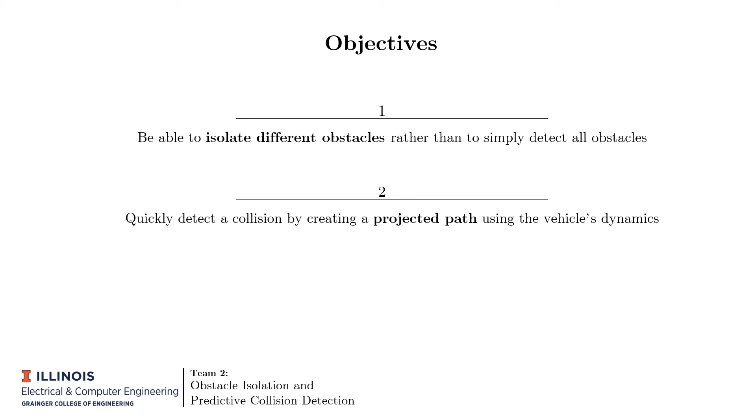In this video, we'll talk about obstacle isolation and predictive collision detection. We have three main objectives. First, the ability to isolate different obstacles rather than simply detecting obstacles. Second, quickly detecting a collision by creating a projected path using the vehicle's dynamics. And last but not least, we want to build a more robust system for failures of the perception devices that are used to detect obstacles.

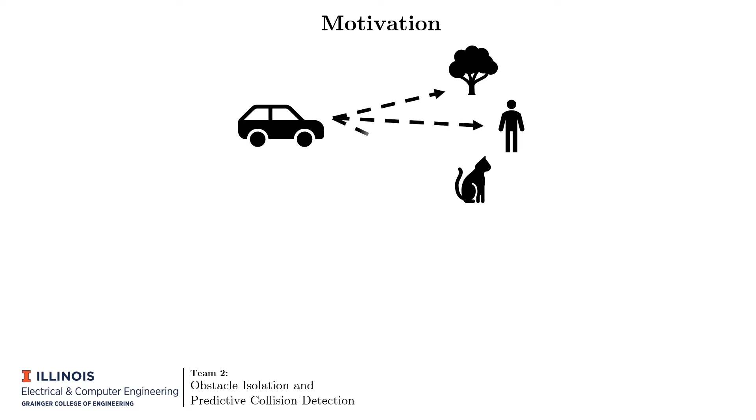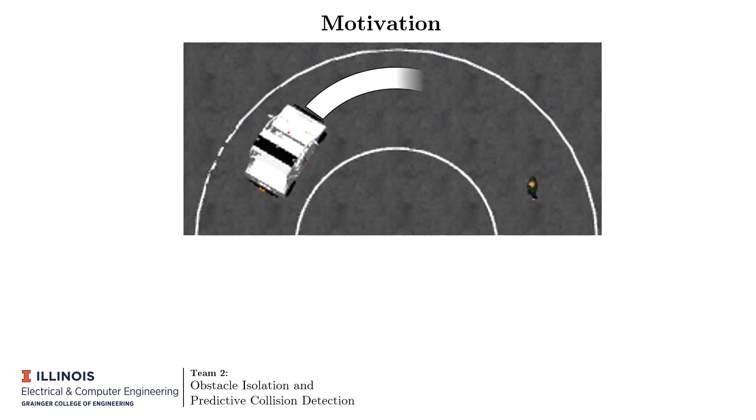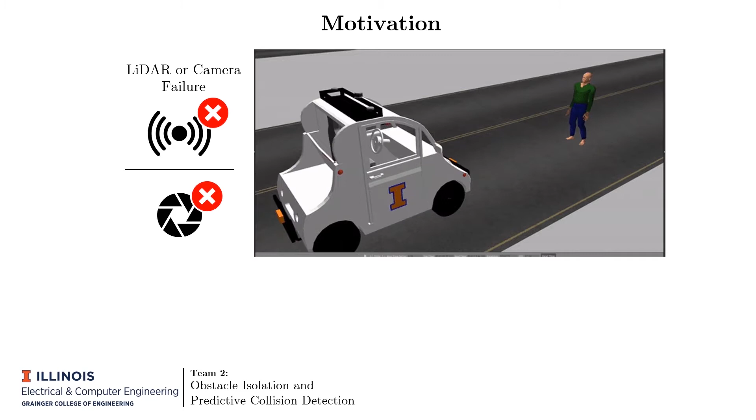We want to address the issue of detecting obstacles that are within a certain view window through the LiDAR sensors, especially when the vehicle is making turns in intersections. And what if the LiDAR or camera fail while going fully autonomous? We certainly don't want these horrific accidents to happen as was shown below. Our claim is that by isolating different obstacles using both LiDAR and camera, the vehicle can be programmed to prioritize specific objects. And with our collision prediction algorithm, we are able to accurately detect collisions and decrease the collision detection time by up to 13.21 seconds compared to the straight projection model in MP4.

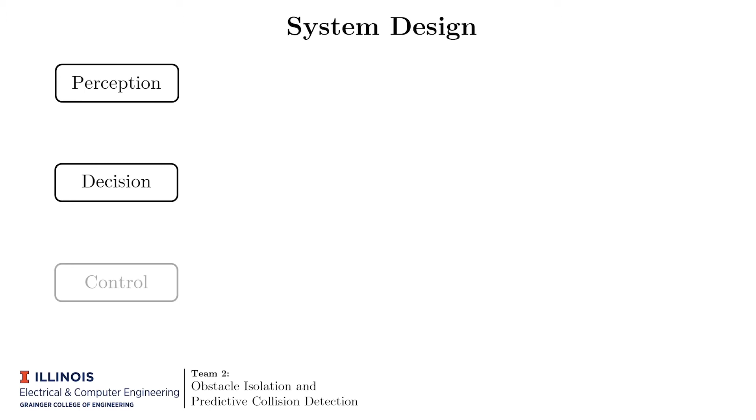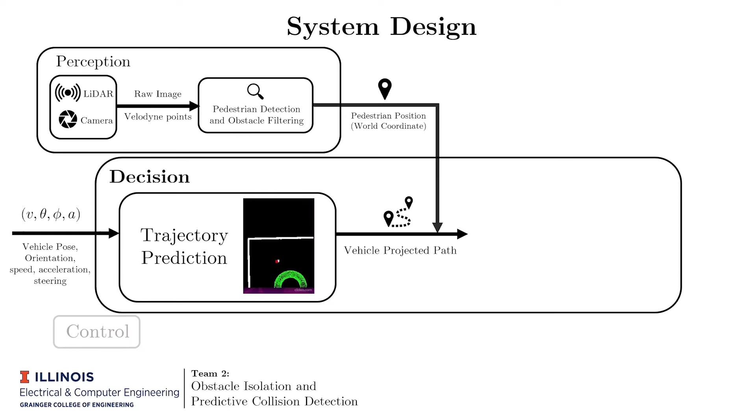We implemented perception, decision, and control modules. The perception module uses the LiDAR and camera to accurately detect the pedestrian's position. The decision module uses the vehicle's steering angle and velocity, as well as the pedestrian's position, to predict the vehicle's path and if there will be a collision. The control module uses the decision on if there will or won't be a collision to make the vehicle stop or continue moving.

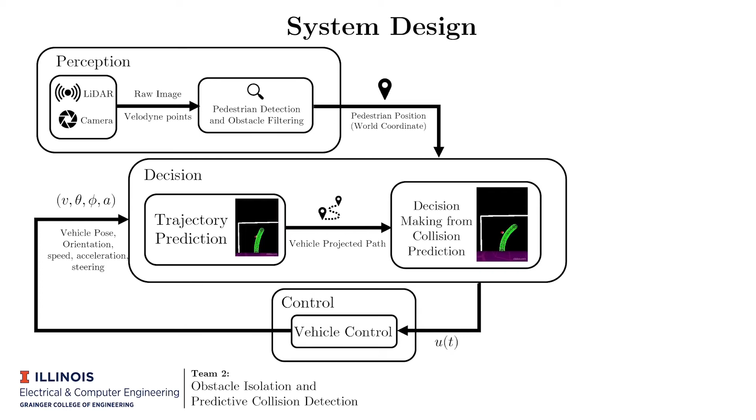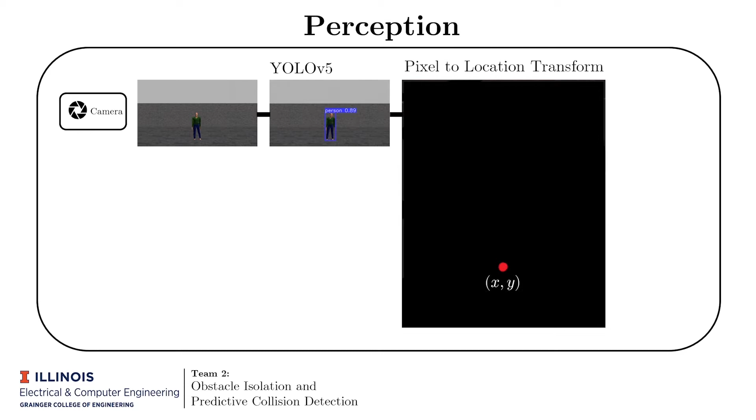In the perception module, we begin by running the camera through a pre-trained YOLO model to detect pedestrians. We then take the pixel coordinates from the bottom of the pedestrian's bounding box and convert them to pixel coordinates for the bird's eye view image by applying a calibrated transformation. At the same time, we process the LiDAR by filtering points in a certain region and then flattening the points to create a bird's eye view image.

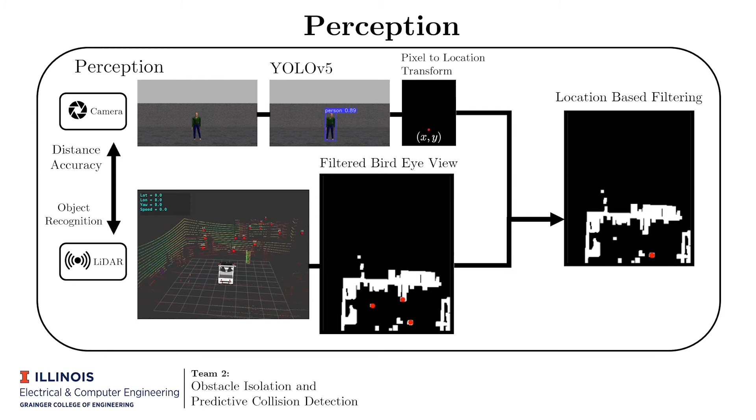We then run Hough circles on this bird's eye view image to find all shapes resembling a person. Finally, we use the pedestrian's previously computed bird's eye view pixel coordinates to filter out the wrong Hough circles. This is done to overcome each sensor's weaknesses with another sensor's strengths. In this case, the LiDAR's bird's eye view can confuse pedestrians with similarly shaped objects, whereas the camera can accurately detect pedestrians. Also, the camera can't accurately detect the distance to the pedestrians, whereas the LiDAR can.

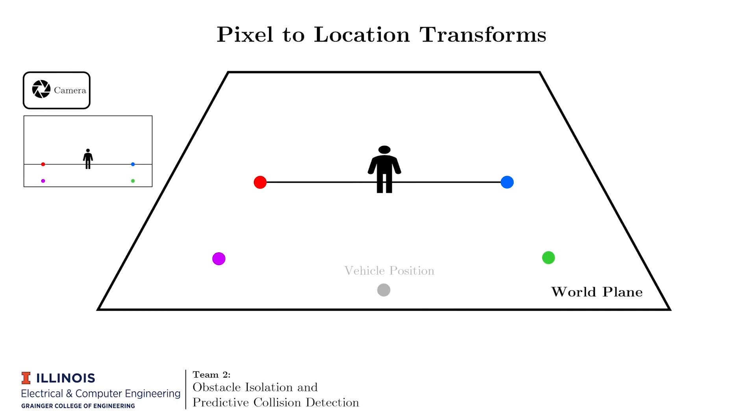Next, to achieve our target, we derive the following algorithms. First, to transform an image pixel to world coordinates, we calibrate the camera reference pixel to the corresponding ground point with respect to the vehicle. We then find a transformation matrix, which subsequently maps pixels to the actual world plane.

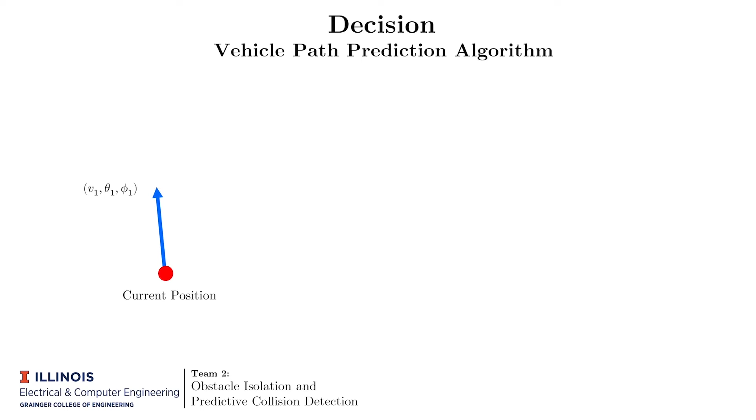Then, to make faster, safe decisions, we must predict the vehicle's path. With current position, knowing the vehicle's physical parameters, we feed them to a dynamics function outputting a next waypoint. Through iterative means, we are then able to create a set of waypoints and subsequently define a safety region. The algorithm is repeated again once the vehicle moves to a new position.

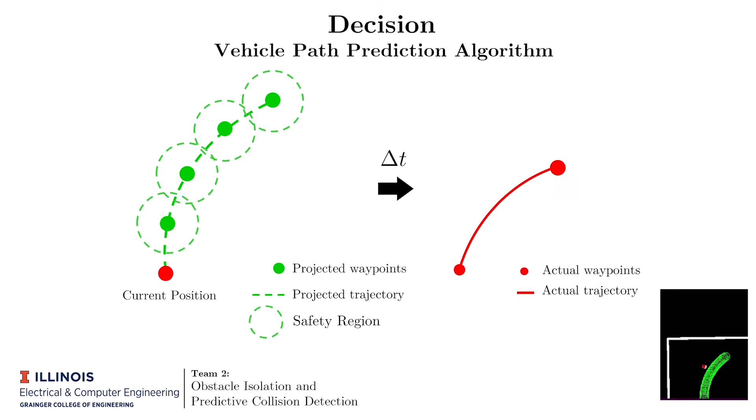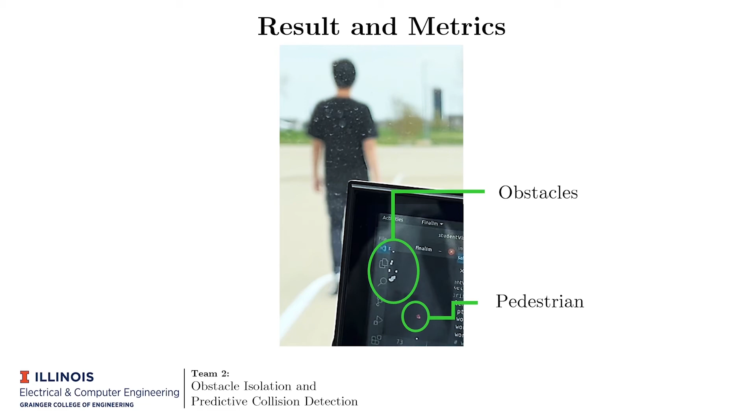Into our results, the perception module loaded into the vehicle was able to detect all the surrounding obstacles, represented by the white dots in the figure, and isolate the pedestrian, represented by the red dots. Subsequently, the vehicle was able to successfully predict upcoming collision with the pedestrian and stop the vehicle when the pedestrian was actually on the track. In addition, it was also able to avoid unnecessary stopping if the pedestrian is near but not on our track.

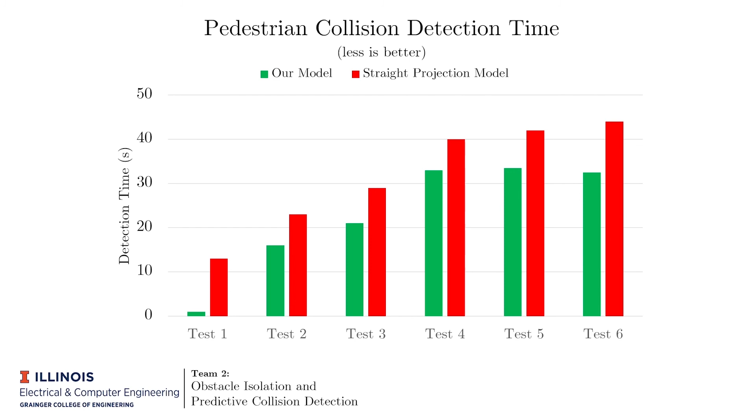In this class, we learned how all the different parts of an autonomous system come together to form the final product, as well as a few specifics in each area to facilitate further exploration. The most exciting parts of the class were the MPs, as they always had very clear applications, and each gave you a better picture of how each part of an autonomous system works. These experiences with the MPs, as well as the concepts of how everything works together, helped us to succeed in this project by providing us a strong background to then try out new ideas.